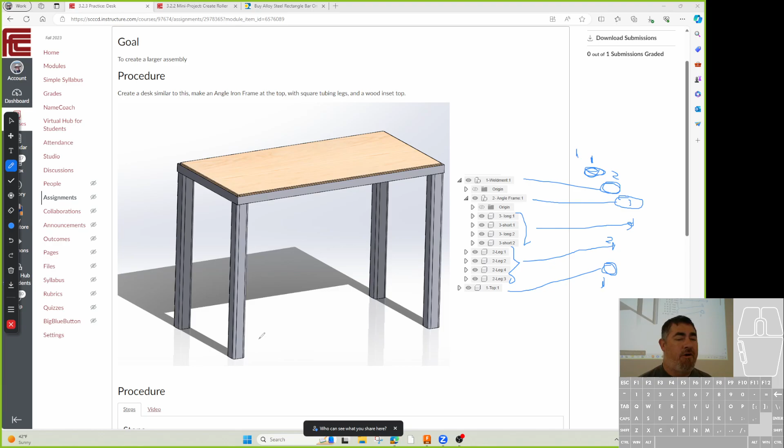Okay, so that's going to kind of be how we structure it. If you just start making your pieces and trying to figure out where it goes, it might get a little confusing. So I like to write this out, draw it out first ahead of time, so you can go ahead and make all your components before you make anything.

And so if I go into here... don't save that, get rid of all this. Kind of there's my list of stuff I want.

I might also, before I even do that, let me show another way to organize. There's a lot of different ways to organize it - I'm going to show you another way. Using a spreadsheet is another easy way to do it.

So I'm going to have my full assembly there, and then I'm going to have the quantity, to tell them how many pieces. So the full assembly, I'm going to have 1 full assembly. To make 1 piece of this thing, I need to have, within that, I need to have the

weldment - so maybe call this the full weldment - and I need to have the top, right? And I need 1 of each of those. In order to make the full weldment, what do I need?

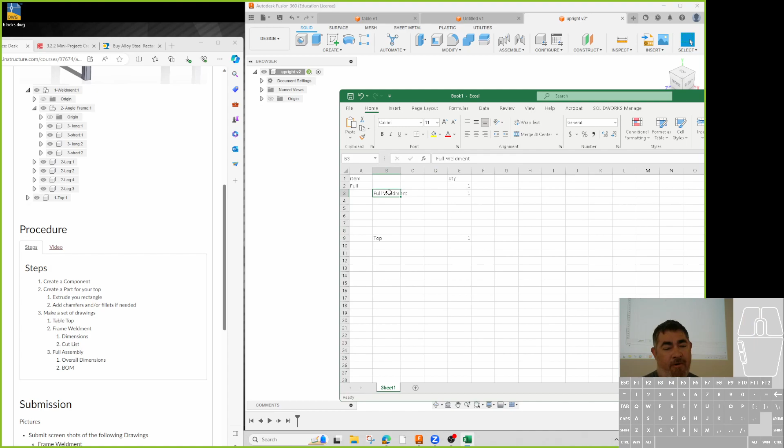No, I need this top frame, right? So I'm going to call that the top, or the angle frame. And I need one of those, right? What do I need to make the angle frame? So I need a long piece and a short piece, and I need 2 of each of those.

Is this kind of starting to make sense? Yeah. And then what else do I need to make the full weldment besides the angle frame? Legs. I need legs. And how many do I need? 4 of those.

So this is kind of another layout of it, of the steps. So in order to make the full assembly, I need the full weldment and the top. In order to make the full weldment, I need an angle frame and legs. In order to make the angle frame, I need these 2 pieces.

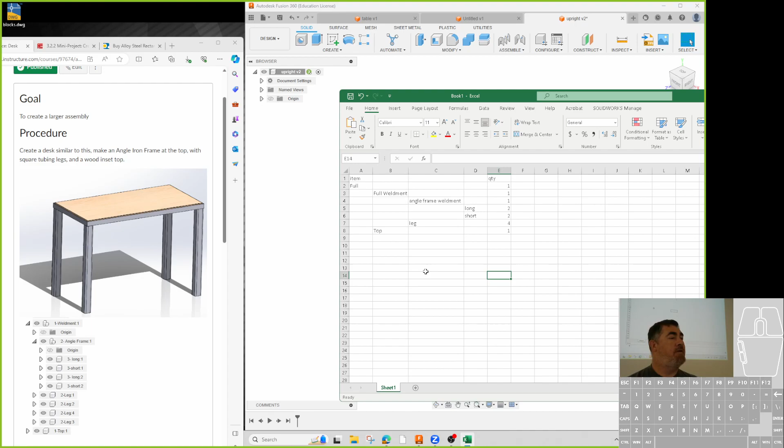Weldment, is that you meant this is weldment? Yeah, so this would be an angle frame weldment. Yeah, it's just, they say weldment instead of saying an assembly. But a weldment is an assembly, just it's not bolted together, it's welded. Okay? So this is the same structure as this here. Does that make sense? Yeah.

Jose, are you paying attention?

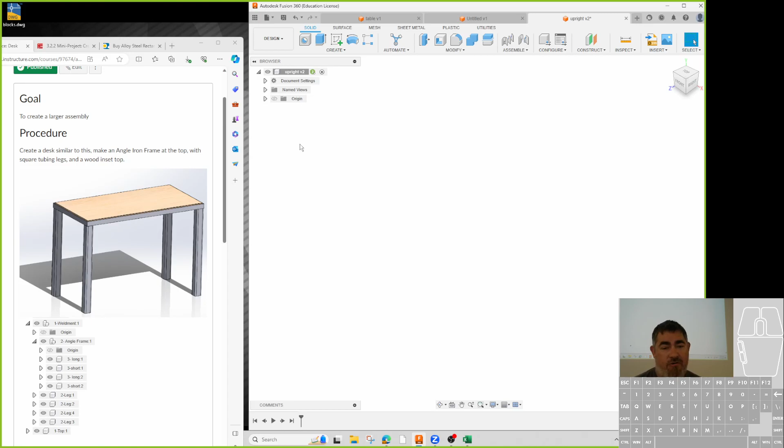Okay, so I could go in and just start making parts and hopefully try and structure them and put them in correctly. That might work, it might not work. So what I'm going to do is I'm going to go ahead and create the structure here. And actually, these parts, the individual components, I could probably bring those in from McMaster, right? Or at least one of them. But I want to get the overall thing right.

And so my main file up here, this is going to be my full assembly. Whatever my name of the file is, that's my full assembly. So I don't need to start this list until this level, because this is just my main thing, my file. So I need to start making components at this level and down.

So I'm just going to go over here under Assemble and say New Component. And I'm going to turn off Activate because I don't want to activate it and go and use it right now, I just want to name it. So I'm going to call this Main Weldment. And on mine, I'd put the 1s just so I could kind of keep track of the numbers. So I'm just going to do that again. So there, and I'm going to say OK.

So it makes that. So now I need to make my top also. So I'm going to do a new component. I'm going to call it top. Make sure the parent is this top piece and say OK. So I've got my main weldment, my top. I'm going to call that 1 also. All right, does that make sense?

So I've got that first level right here done. The full weldment, my top. Now I need to make, underneath the full weldment, I need to have components for the frame, angle frame, and I need a leg, right?

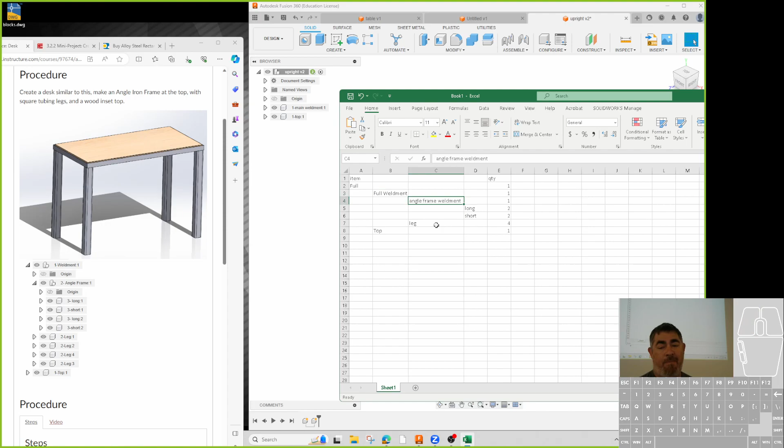And so I'm going to make, so I'm just going to pick on that one, go to new component, and so my parent is going to be that one I just picked. If I didn't pick it, I can just pick on it here. So I want this new component to go underneath that one, and I'm going to call it angle frame. Now I'm going to call it 2. There, see, now it's going to stack that one underneath. Does that make sense?

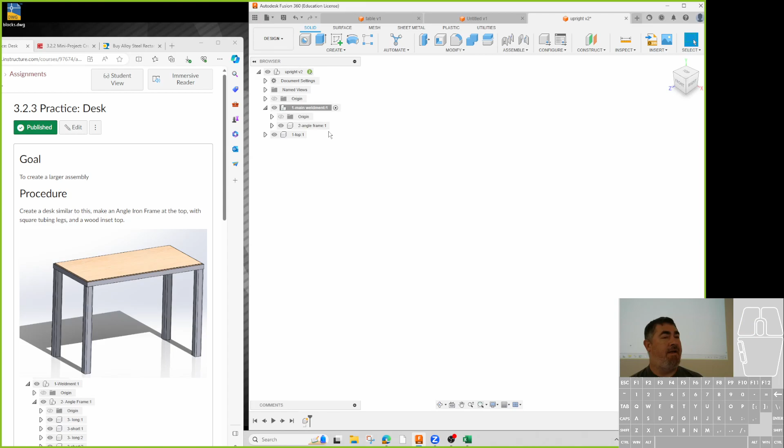Yeah, so now I have 2 ways to do it. If I'm going to just draw my pieces individually, I can make components for them. If I want to bring stuff in from, say, McMaster, I'm bringing that new component in underneath this component, right? So I'm going to turn this on. So I'm going to go over here and see the little button here, and I click on that. So that makes this one the active component. So now if I go to McMaster,

And you notice, did I tell you how big to make this thing? What does that mean? It's up to you. You could make this a big conference table, or you could make it a coffee table, or a side table. I don't care. As long as you make it angle iron frame on the top, vertical legs, and a wood top inside of it, that's all I care about. So you can make these round legs, rectangle legs, square legs, whatever. You can make this whatever size angle iron you want.

I don't care. You're doing the same thing, but figure out what you want to do, okay? That's the other part of it, you have to figure out what size do I want to make this. So when should you figure that out?

And then my angle iron, maybe I want it to be kind of smaller. If my top is only 3/4, I probably don't want my angle iron going up more than the side of it, so maybe I'll keep that at 3/4 by 3/4, something like that. Do I need to put a size here for the angle frame weldment?

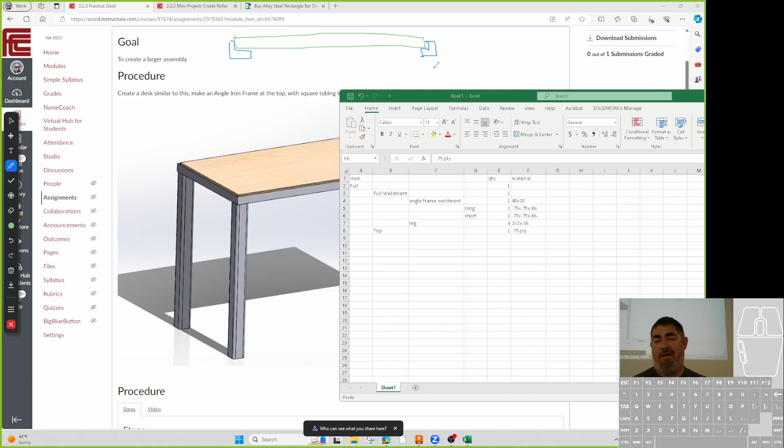If I subtract 3/4 on each side, make it 1.5 inches, it's just going to fall through the hole, right? Wall thickness, yeah, just the wall thickness. So the thickness of the angle iron here is how wide?

0.06. And so I need a thickness here and a thickness there, so 1/8 of an inch, right? So it needs to be 47 7/8. That's going to be really tight. So maybe 47 3/4, give it another 1/16 of space on each side also to have some wiggle room.

Because wood, what happens to wood? Does it stay the same size all the time? What makes it change size? Moisture, right? Does steel stay the same size all the time? What makes steel change size? Temperature. Does temperature and moisture always change together? No. So giving a little bit of space there so they can move is probably a good thing.

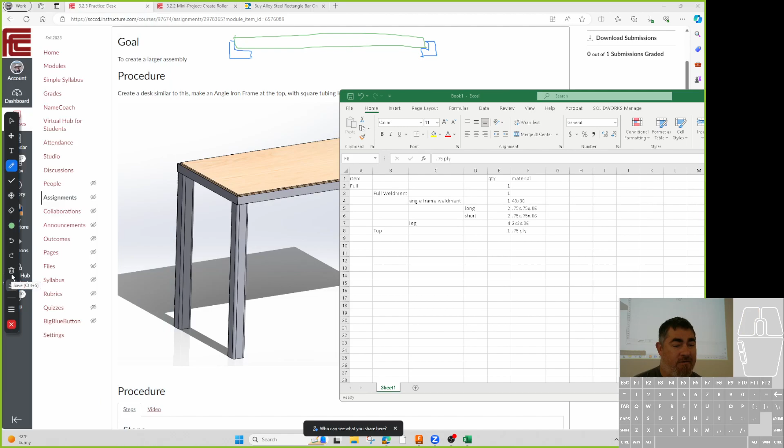And so this is going to be kind of your time to figure out how it's going to fit together, what goes together. And if you make the number and it's the wrong number, are you dead? Do you have to start all over? No, you just go in and change one of the numbers, right?

You put it together, you see, oh, they overlap some. Just go in and edit that part and make it smaller. It's not the rule, that's why we use the software, so that way you can kind of come up with an idea, put it together, and we're like, oh, this fits good, or oh, this doesn't work at all, I need to fix this.

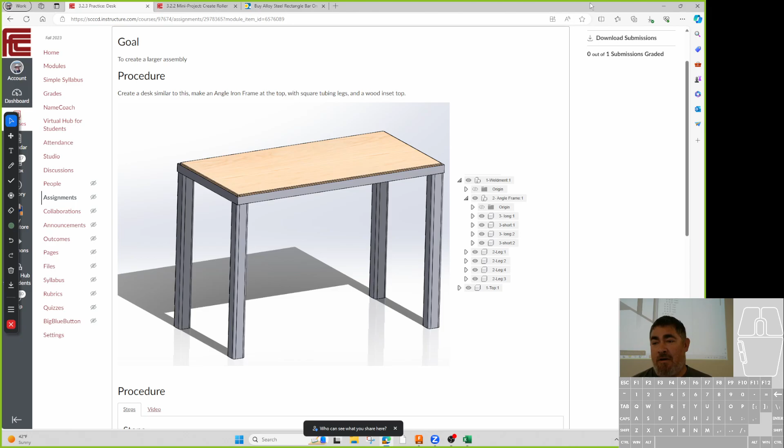Okay, so let's go back over here, and I want to put in. Since now I know what size my legs are, I'm going to drop those in right here. So I'm going to go in and pick square tube. I'm going to do easy to weld, 4130. And I want it to be 2 inches.

Oh, it is 0.065. So is 0.065 a 16th of an inch? It's close, not quite. But a 16th is what? 0.0625. So twice of this is an eighth, it's a little bit over an eighth. So that's why we get close with it, and then we can go with it.

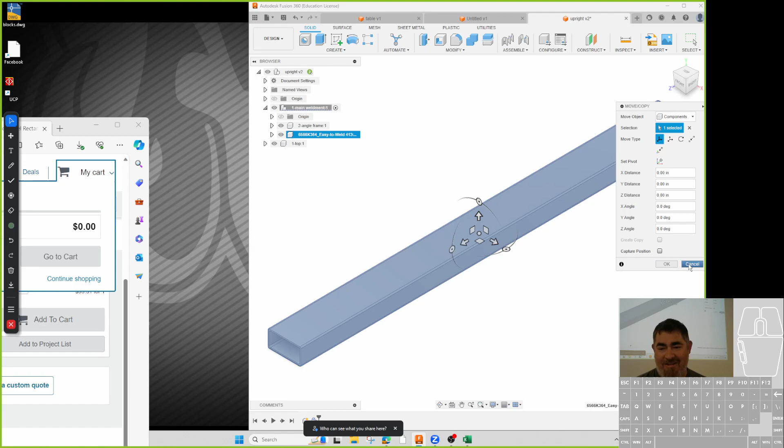And I want these legs to be, I'm just going to call them 2 feet long. What format do I pick? SAT, yeah, SAT, hit download. Uh-oh, that's a rectangle tube. That's not what I wanted. Somehow I missed that.

It's another reason this view here sometimes, I see that these are all, this type is all rectangle tube, even though I told it I wanted square. So I'm going to go back one. That's rectangle, I want square tubes.

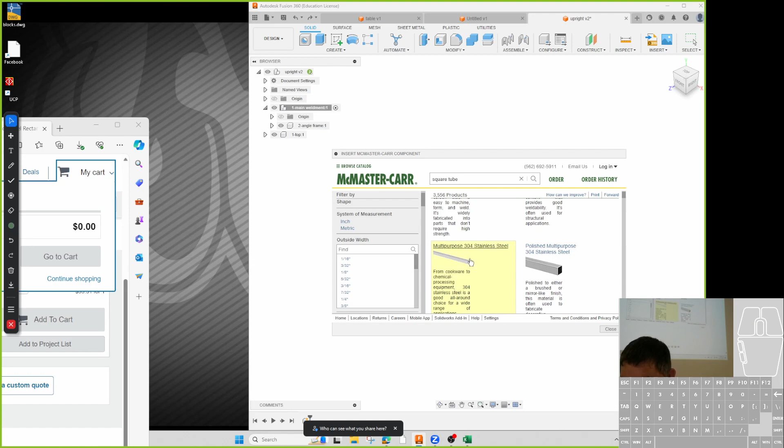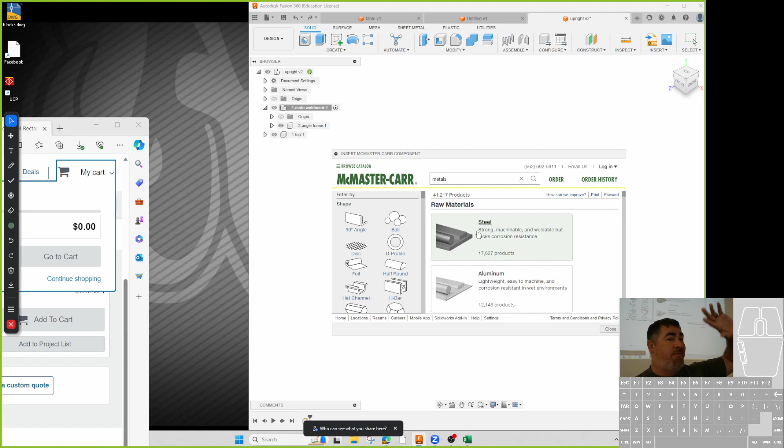All right, I'm going back in here. Raw materials, metals. This is where sometimes it's better to go into the actual website and look stuff up first rather than trying to do it as you're going through.

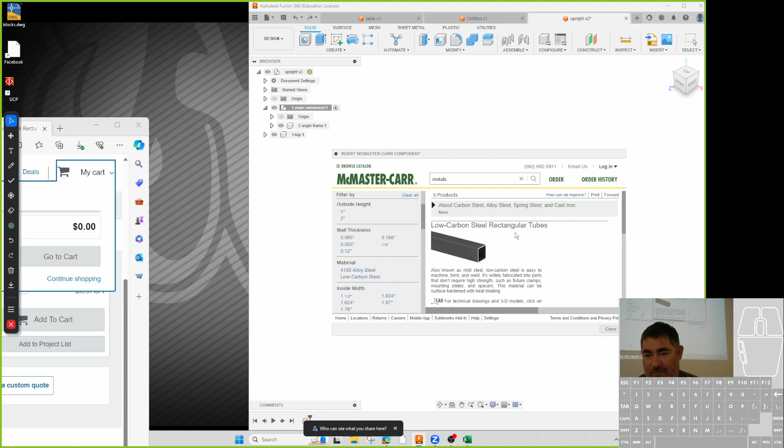Apparently McMaster doesn't have square tube, they only do square rectangle tube. Oh, there we go. So, 2 by 2, and I want 0.065. There we go.

So square tubes are inside rectangle tubes here, but there's no 2-foot piece now, so I'm going to say a 3-foot piece. Download it.

I want this to be 2 feet long. What do I do? Yeah, so just do it extrude, or grab that, -12. Cut. There we go.

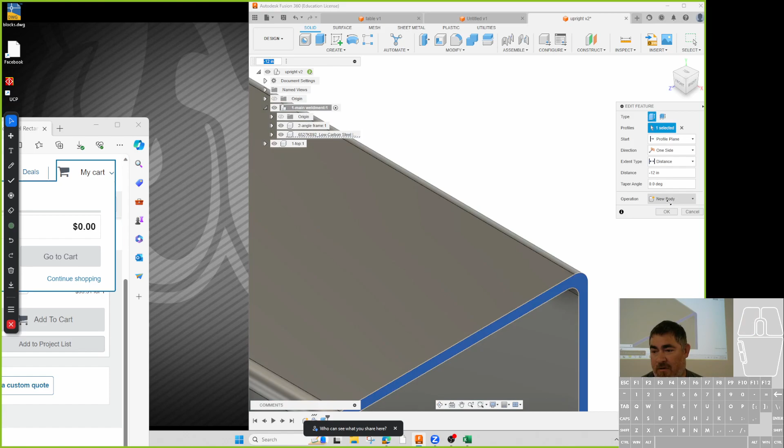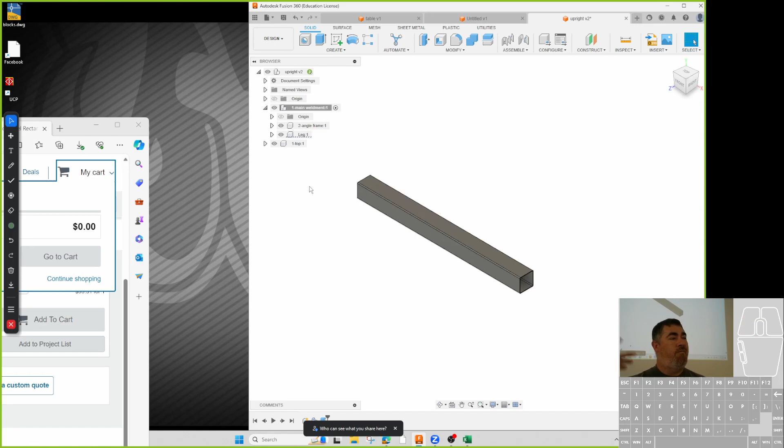So it put that in that new component underneath the one that I had activated. Now I can just go in, edit my properties, and I want to call this my leg, and the description is 2 by 2 by 0.065 square tube. There we go. So if you're bringing in components, you can just do that.

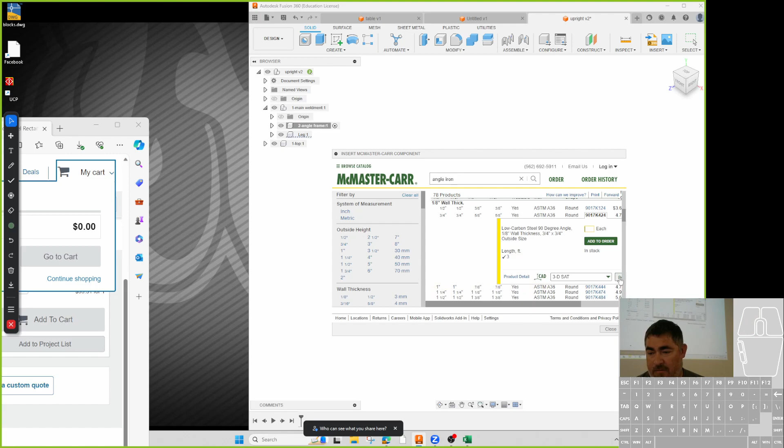Now I can go into here, activate this, insert McMaster-Carr, and I wanted 3/4 by 3/4. I should do that. Now you can see it stuck that under the angle frame, and it kind of grayed out this other stuff that's not part of the active components I'm working on. Does that kind of make sense?

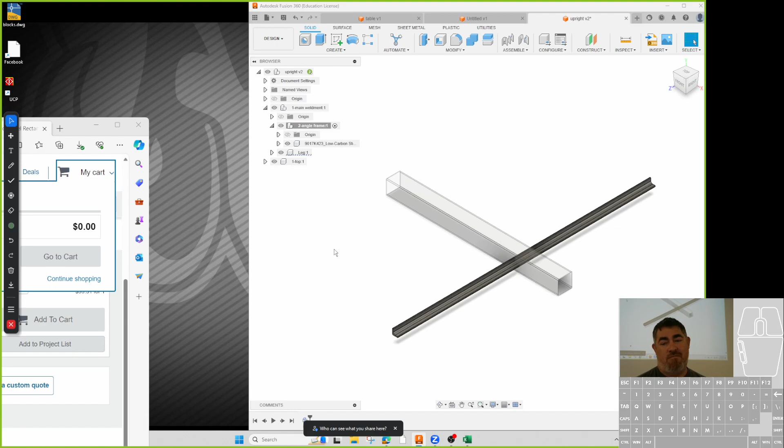Yes. There's going to be 4 sides of the angle tubes, the angle thingy, so then you're basically going to join them together. Yep, so I'm going to take this piece here, I'm going to extrude, pick there, new component.

So I need 2 different pieces of that, right? So now I have one long piece, short piece. And now I can do my chamfers on them.

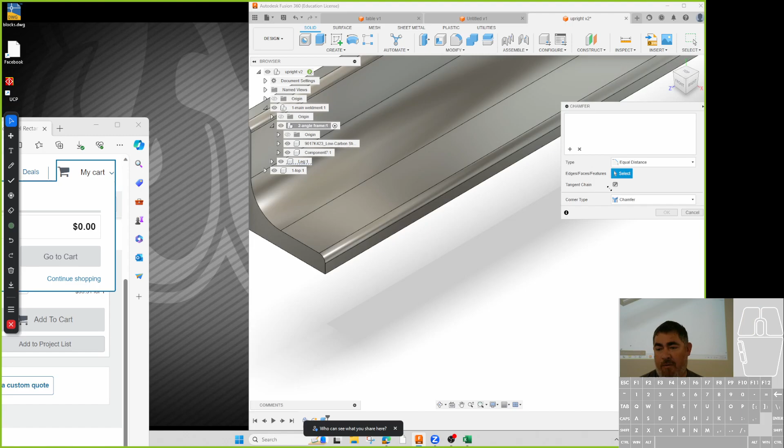So I want to turn off this tangent chain because I don't want to chamfer all the way up and down, right? So I want to turn off tangent chains, so I can just pick that little vertical piece right there. Now I can go over. How big do I want to make this chamfer? 0.75, however wide my thing is, right? So my piece is 0.75, make it 0.7.

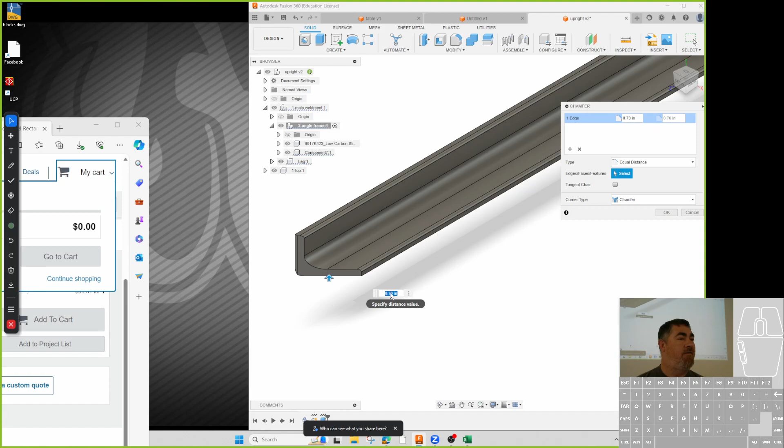Don't just drag it until it stops and say, oh, it's too good, because right now it's at 0.7, it's not going to give me a sharp miter corner, right? Just make sure you type in the same thickness as your part is.

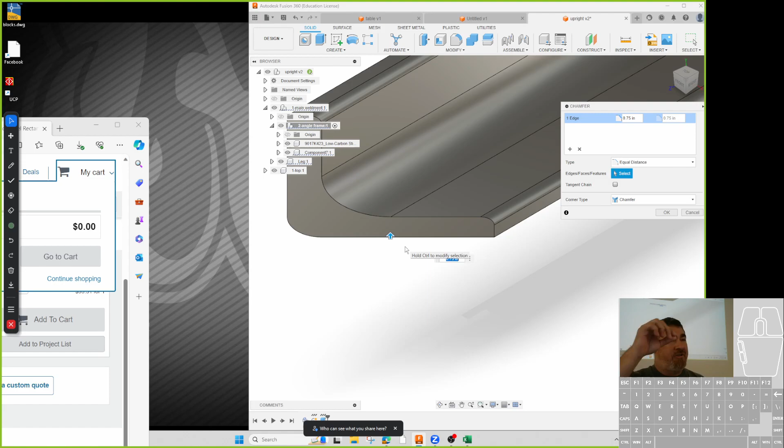A little trick is if you zoom in more, it'll let you do it, because how much it kind of moves per click when you drag it depends on how far you're zoomed in. If you're zoomed out, it does like every half inch. If you're zoomed in a little bit, then it's every 10th. If you zoom in a little bit more, 50 thou. So the closer you're zoomed in, the smaller those little snaps are. I didn't realize that correlation.

So get that one, maybe turn off this one over here, so that way I can move in here, hold control, grab that one. I can turn that one on. Hold control. Oop, turn that one off. Hold control, grab that one.

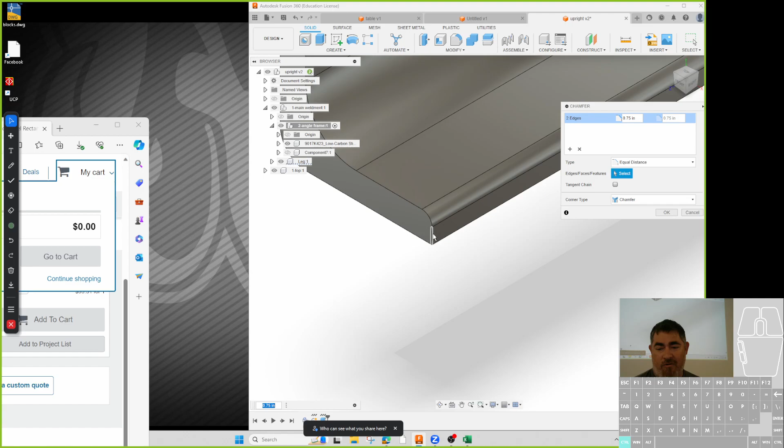So those are two different pieces since you did the controlling, correct? Hold control, grab that one. And so just by kind of turning them on and off, now I'm doing all 4 of my chamfers at once.

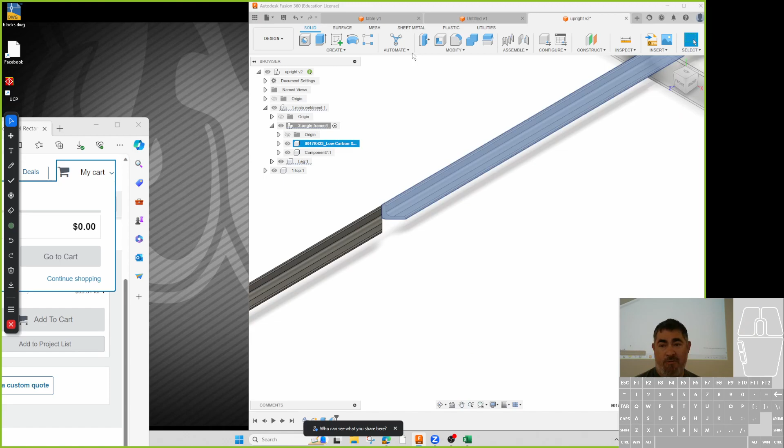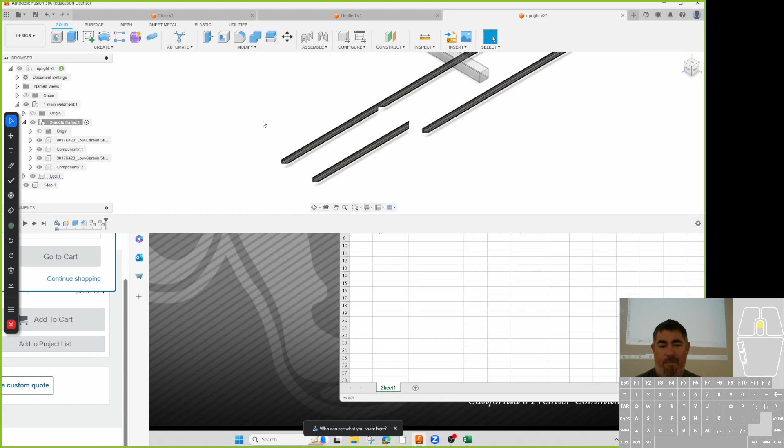And now we just need to mate together, right? So I copy those. I'm going to take this one, copy, create a copy, drag it over there, grab that one, move and copy, create a copy, drag it over there. And why is my thing all, there we go.

So I've got those, now I just need to mate them together. So mate, it's a joint. Again, kind of figure out how you want it to do it. So you either come in here or go on this line.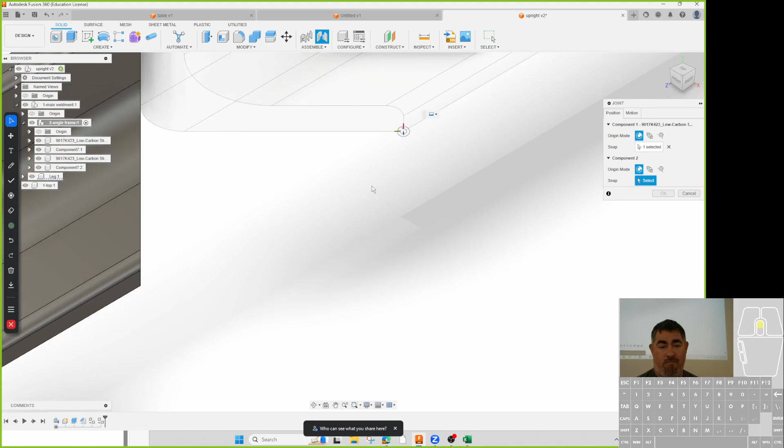So maybe I want that bottom corner there, and I want the bottom corner on that edge there. Uh-oh, flip it, and I picked the wrong thing. It was pointing down. Yeah, I should probably ground one of those things too, right?

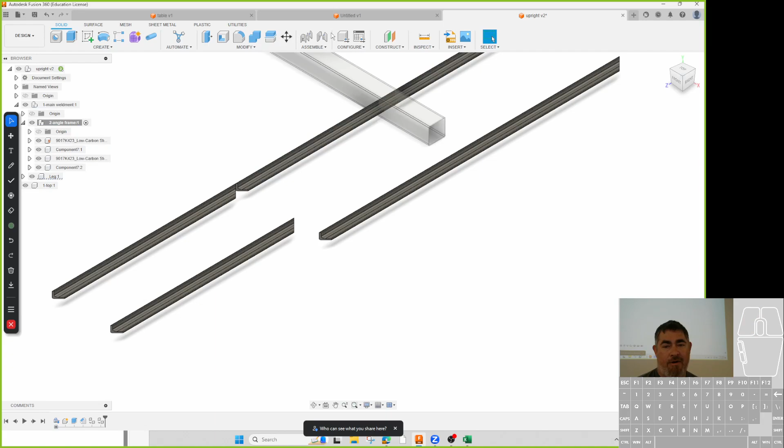I should probably, maybe that long one, maybe I should ground that one. Now when I do the joint, turn it so I can actually see what I'm doing. And now I can go in.

That's why I like being on the face. Click the face first, tell it where to go. There, click the face first, tell it there. And it lines up perfect. Okay?

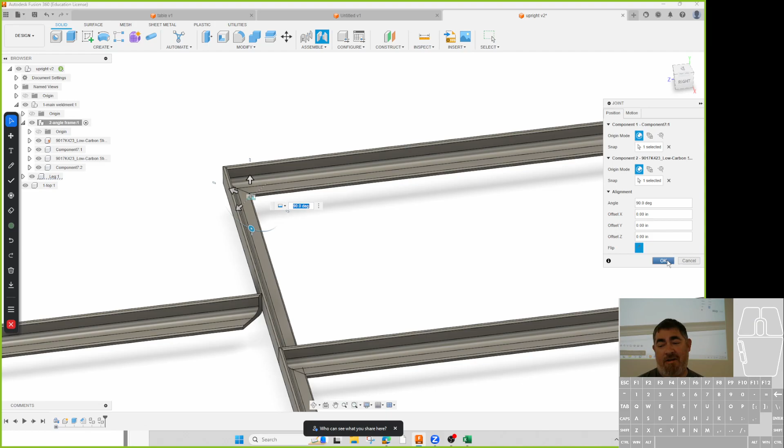One extra click sometimes is worth it. That way you know exactly which one you're going, so you're not unsure which way you're turning. You want to be on this face, you want this face to touch this face, and then you can tell where on the faces to match up. Does that make sense?

And then just keep going through. Same thing, copy yours, and once you're done with this one, you can go back up, activate this one, copy your leg and put it back in, and then start putting it together.

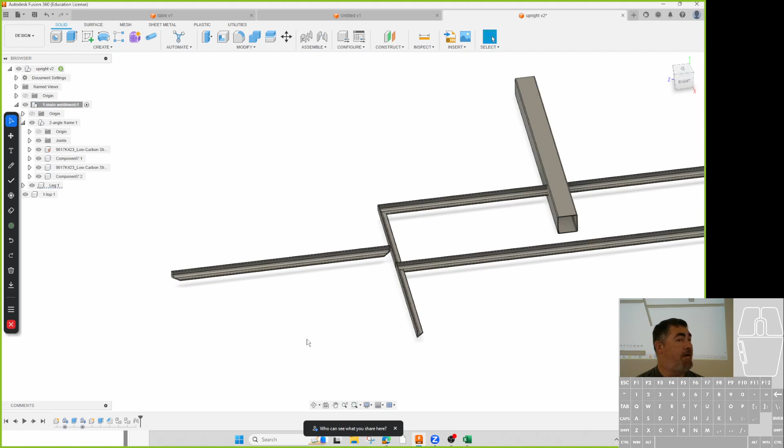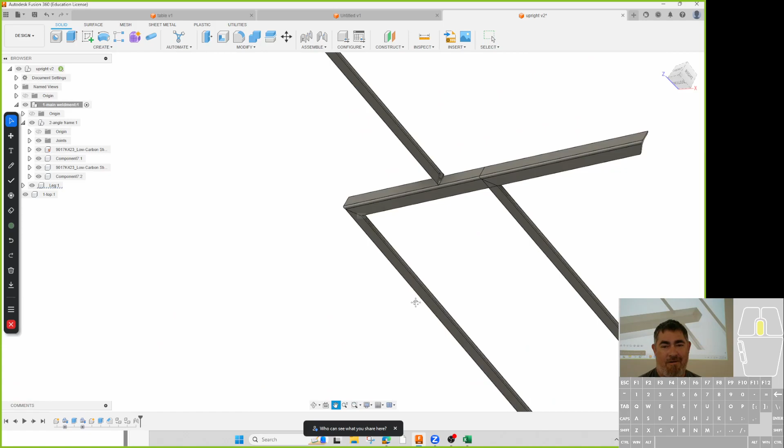Uh-oh. I want that corner of the leg out there. But there's no corner there, and there's no corner there. If I want this leg to fit there, I want this to fit into there, right? There's no corner of the leg for me to line up. And this edge doesn't go all the way to the bottom for me to go to.

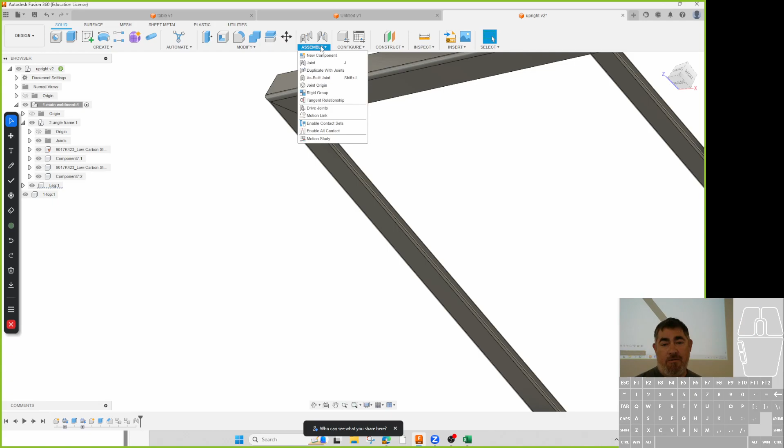Uh-oh, I can't project from the joint. I can put it there and just move it down. Was there another way to make a new place to grab onto for the joint? Yes, what's that called? Joint origin. So if I do a simple joint origin, I have a few options.

I can just do a simple one. I can do it between two faces. I can do it as two edges' intersection. Will that work?

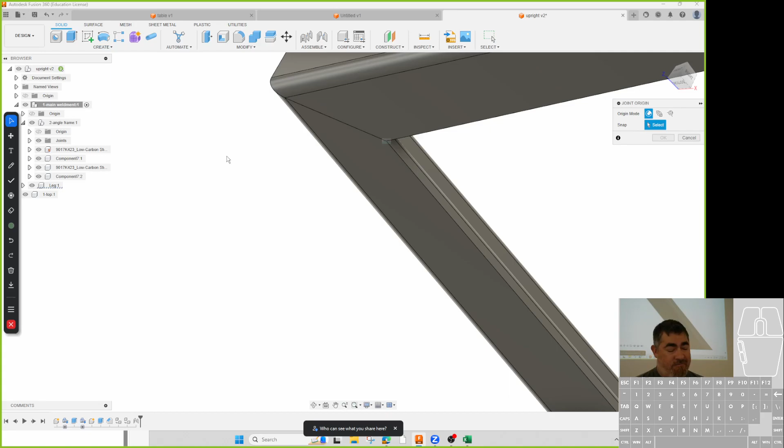So for here, are there two edges that intersect somewhere out here? Is there an edge right here that intersects out there? No. What about that edge and that edge? Do those intersect at the corner? Yeah, so let me go there, pick that edge and that edge.

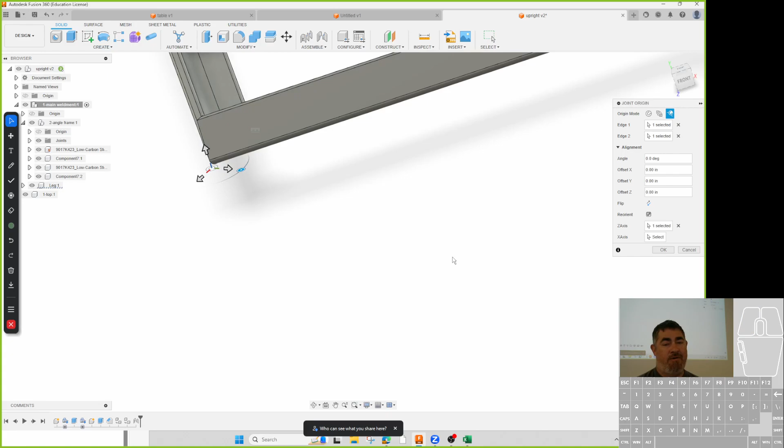Is that going the right direction? Probably want it facing down, right? So I can just go to reorientate and pick something going in the right direction. I'm just going to pick anything that's facing the way I want to face. So now I've got a little thing there going down. Say okay.

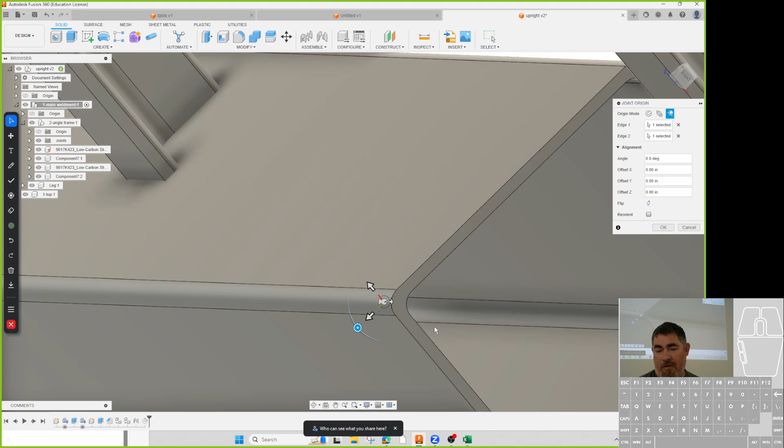And now here, same thing: assemble, joint origin, two edges, boom to boom. And is it facing the right direction? Yep, so I say okay.

So now when I assemble those, I can just pick that joint origin and tell it to go to that one. Flip it around, rotate it, and there we go.

And you can see that in that leg, I have a folder now called joint origin. That joint origin is going to stay with that leg. I'll probably have to make a new one for each of the four corners on the frame, but that's a pretty easy thing to do. It lets us move things with a little bit more control.

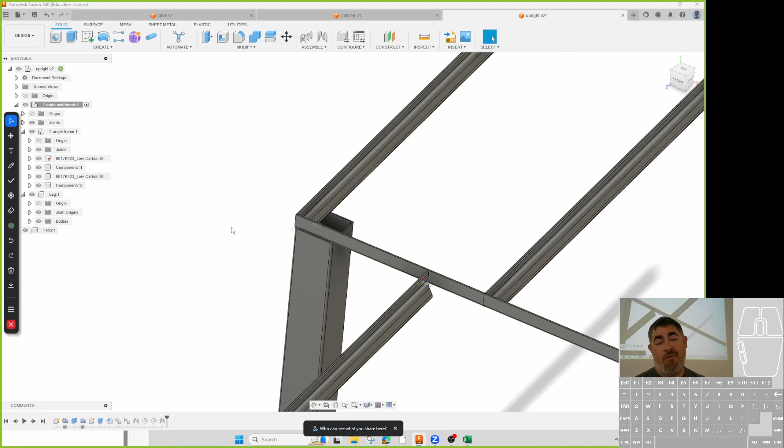Okay, any questions? Since we're not going to be doing the SolidWorks stuff, this is going to continue through next week. And next week I'll put the stuff for Onshape just so you can see another way to do it.

Mr. Lopes really likes Onshape, that's what he uses. I like Fusion a little bit more, but there are times I want to do stuff in Onshape—like if I'm out somewhere without a computer in front of me, I can do some basic Onshape stuff on my phone. It's not as easy as a keyboard and mouse, but it works, especially for just raw sketches, it's pretty good. It's the best phone-based thing I've used, and a lot better than drawing on it with my finger on just an image.

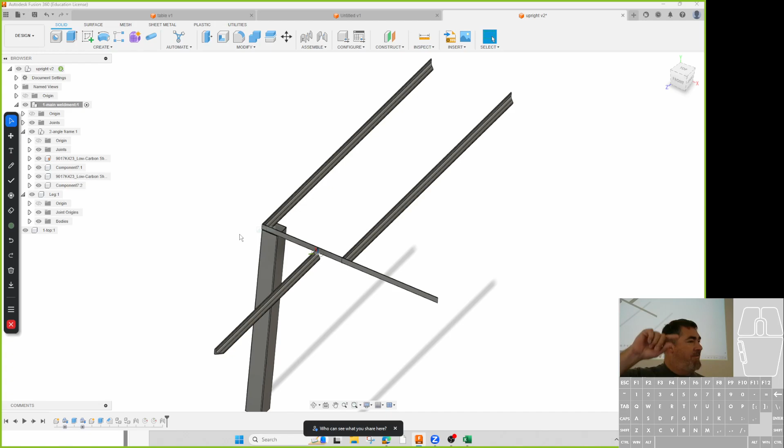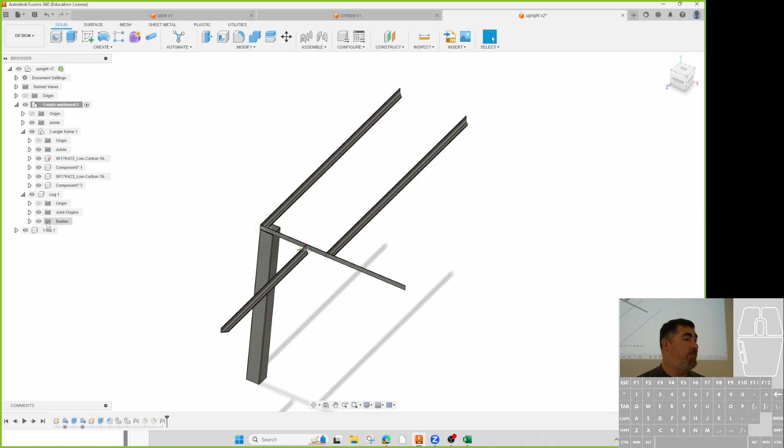Any questions on any of that? Yeah, so the top, when we do the material, it's going to be wood. Pick a kind of wood—pine, oak, whatever. Pine is probably not a good choice, but plywood, just straight plywood, is usually some kind of softwood. You probably want to pick a hardwood, so oak, maple, hardwood ply, something like that—that's furniture quality. But for this assignment, I don't care.

And you can even bevel the edge or whatever you want on it. That's fine. I'll do another video showing how to make the drawing from it.

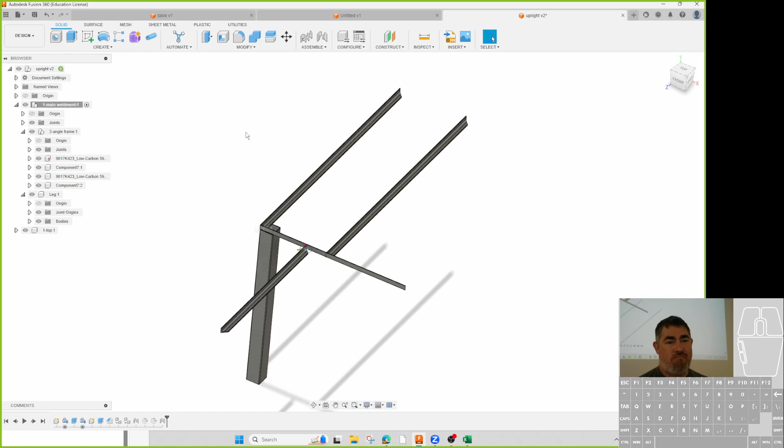The wood looks like it's got little pieces, like little pebbles and kind of... Yeah, I think on my thing... yeah, I had a little chamfer there.

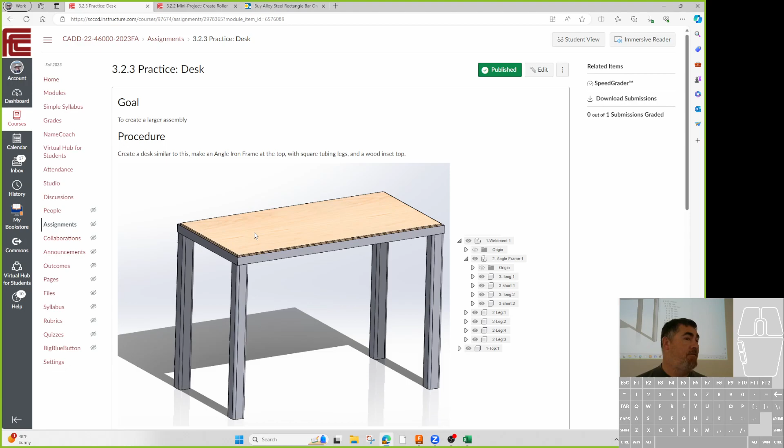Yes, chamfer. You can do that however you want—you can do a chamfer, you can do a fillet. Usually you don't want a sharp edge on the top of the desk, usually you want something there. If you want to keep it simple, you can keep it simple. If you want to challenge yourself, you can do something a little bit more decorative. So it's up to you, okay? Any questions? All right.